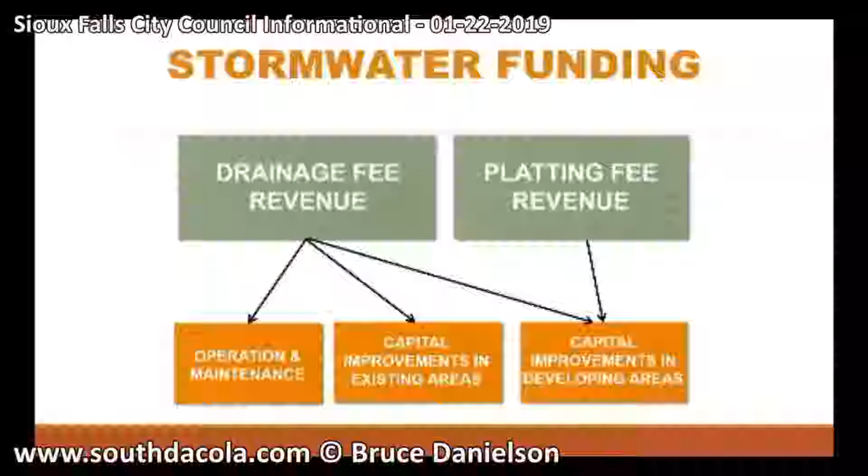Significant milestones for our program: the drainage fee was implemented in 1982. It's been around a long time, and it's a great funding source. We were very fortunate that our predecessors had the foresight to implement this fee a long time ago. There are communities trying to bring something like that forward now and facing several challenges, so it's been very beneficial. Our residents pay that fee, it helps fund our program, it's a great revenue source, and it's a separate fund from the general fund.

DENR issued us a permit in 1999, a Municipal Separate Storm Sewer Systems (MS4) permit that guides how we control water quality in town. In 2003, following that permit issuance, we developed a master plan that identified regional BMPs throughout our city to serve both the water quality and water quantity detention needs. In 2005, we implemented our sump pump collection system requirement for all new development. In 2014, our flood control levees were certified, which took over 1,200 properties out of the floodplain — a very significant change to the system.

In 2016, we introduced our construction team into our collections crew. They're able to go out and do a lot of the work we were having to contract out before. Then in 2017, private BMP ordinances were adopted that allow us to regulate private BMPs that previously were not addressed. They were required to be installed but were never really looked at afterward to ensure they were functioning properly per our permit. I'm not going to read all these, but there are some interesting stats.

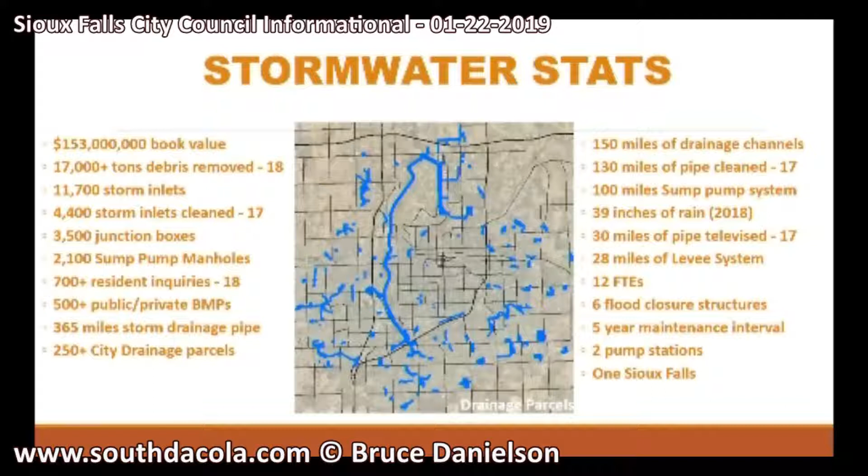I'm going to focus first on the maintenance opportunities and activities that our group does. We have a great construction crew, jetting crew, and televising crew that go around the city all year round, performing improvements and checking that our systems are functioning properly.

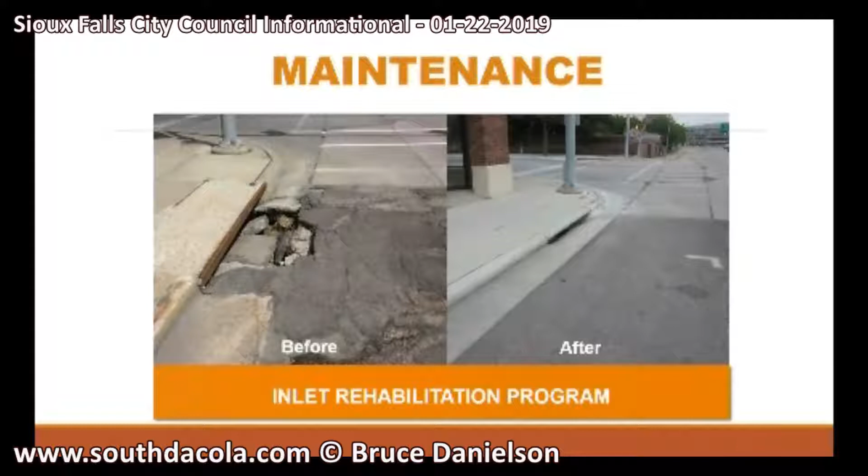Here's a great picture of our inlet rehabilitation program. Inlets not only fail with the lids getting broken, but if a seepage point or void develops between the pavement and the apron on the inlet, a sinkhole can start forming and pavement will start falling in. As you can see on the left, we go out, cut that asphalt out, cut that curb out, rebuild the inlet, and it looks really nice after our crews get done with it.

Some areas are a challenge where grades are very flat and intersections are not able to drain fast enough, so we do what we can in those intersections to try and get that water out before it gets to private property.

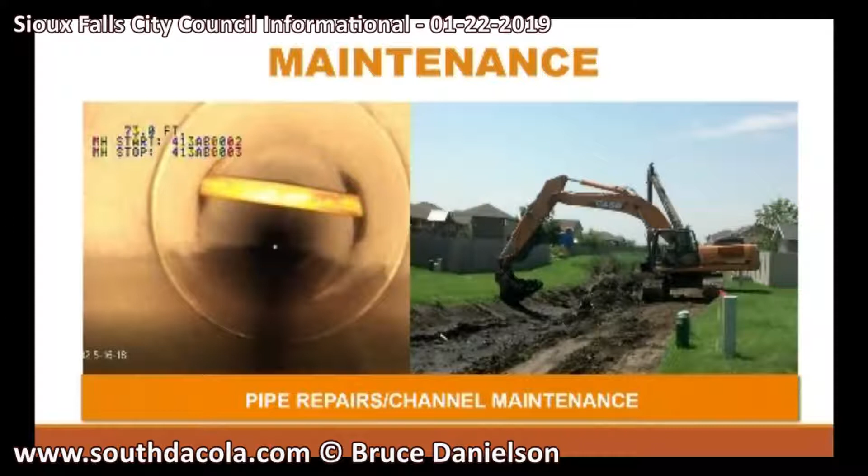Some of the constant problems we fight are utility hits, punctures to our system. It's a challenge that the private industry will tell you is very difficult at times as well. Nobody can be perfect, but that's why we televise our lines, to see if something like this has happened. We can address it with that private utility, make sure we get that out of there, get the pipe replaced or repaired so that when debris and water is flowing down that pipe, it's not getting hung up and losing capacity in that pipe system.

On the right is a drainage channel out by Grinnell Avenue and 32nd Street. A few years ago, we had to go in there. It was getting overgrown to the point where water was not able to properly flow through and drain out in a timely manner. We went in there, reestablished that channel, seeded it back and stabilized it, improving the capacity in that channel. This is a great example of a much larger scale channel rehabilitation.

Natural channels are a wonderful thing, but when a tree dies or gets eroded and tips over and lays across a channel like this, when water flows through there it finds a new pathway, and a lot of times that pathway goes up onto the private property and side slopes. Then it starts to erode, and all of a sudden you'll have a 10-foot, 15-foot tall vertical drop in somebody's backyard. So we go in, and it does a lot of times require significant tree removal. It's a challenge with homeowners on these projects because they're losing a lot of those trees in the backyard. But in order to properly get heavy equipment in there to grade out that channel, add some riprap and drop structures, a lot of times trees do need to come out of there.

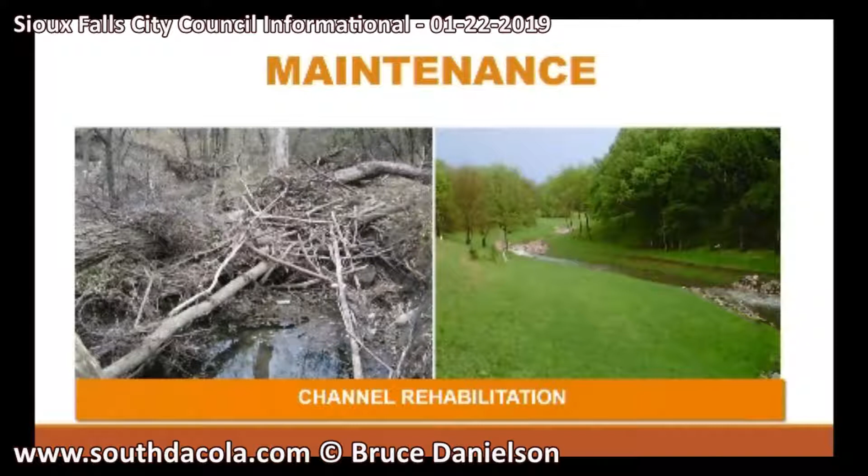A couple items that are not directly related to drainage, but we do help fund through the drainage fees, are street sweeping and mosquito control. We fund the first sweeping of the year because it has such a significant impact on water quality and our drainage system. If we can get a lot of that sand and material off the streets from winter de-icing activities before it gets washed into our systems during spring rain events, we have less sand and grit going into our channels and ponds, and potentially less salt affecting water quality. So we fund a portion of the street sweeping program.

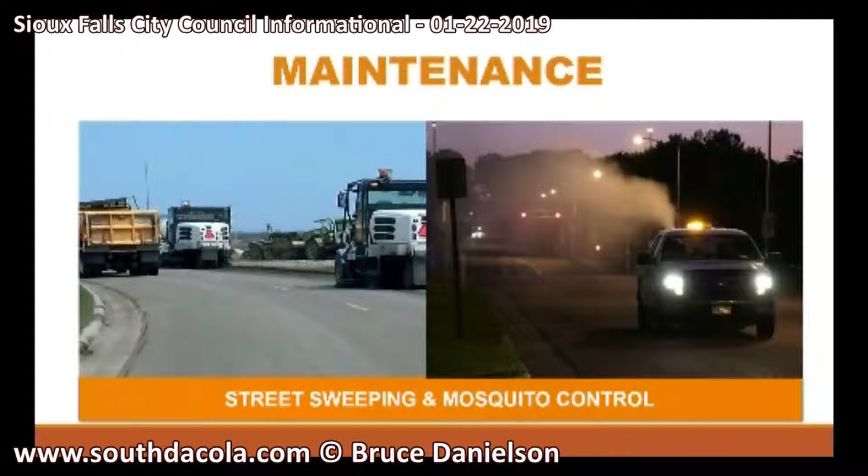Likewise with mosquito control, because you saw that map earlier with over 200 drainage properties around town which have water or saturated conditions, we contribute to the mosquito growth potential in the community, so we fund a portion of their budget as well.

Vegetation management - I know I've had discussions with some of you on this. This is very much an eye of the beholder type thing. Some folks like to look out their back windows and see a native prairie, others want to see a manicured bluegrass lawn. We, 7 or 8 years ago, implemented this program: on drainage properties, we do not mow the entire property. We mow the outside 12 feet as a buffer to adjacent properties. The remainder is left in its natural state with weed control, using an aquatic-safe chemical sprayed on the weeds to manage thistle growth and that type of thing.

We've also done this with buffers along the bike trail system throughout town. Those taller grasses, while they can collect garbage, that's the idea sometimes - they provide a filter or buffer before water can carry pollutants or debris into our waterways, into the river.

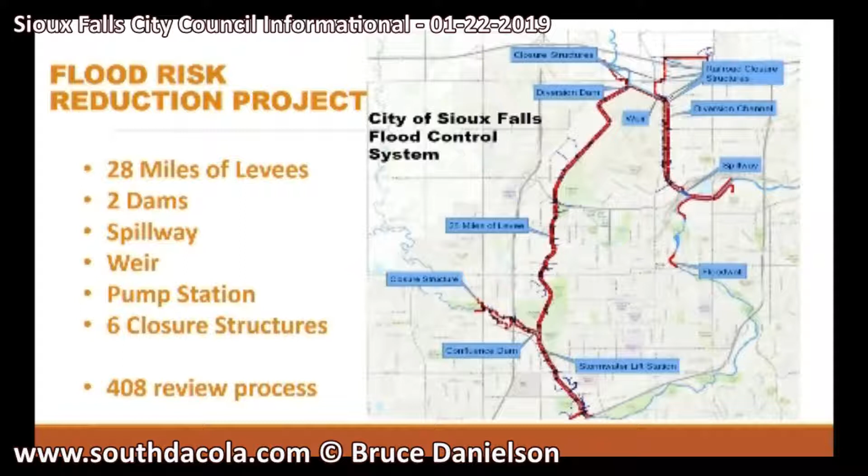One of the primary tasks I deal with regularly is the 408 review process. I don't know if you're familiar with it, but consultants in town are, because it is an extremely lengthy process. Anytime somebody is doing anything within 500 feet of our levee system, the Corps of Engineers requires that they review those plans to ensure the activities won't lead to seepage issues or increased risk to our levee system as a whole.

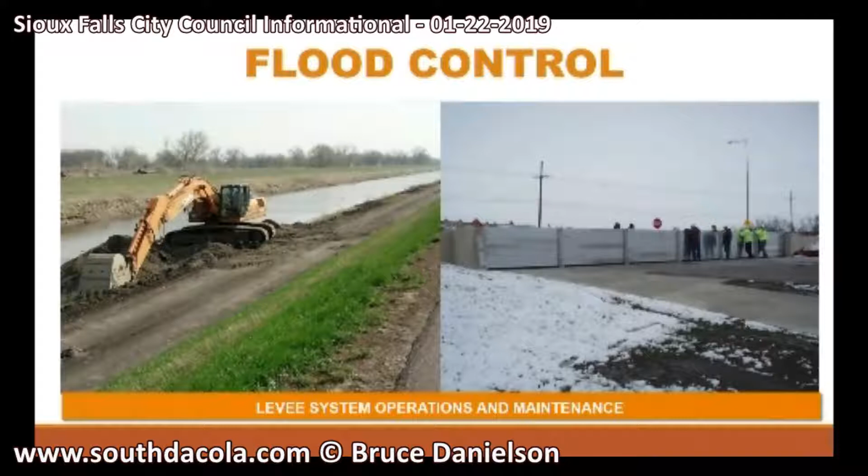I'm going to turn it over to Lance Weatherly now to talk about the neighborhood improvements and our engineering standards.

Good afternoon, Council. Lance Weatherly, Principal Drainage Engineer for the City of Sioux Falls.

I think a lot of people are aware of this project. We worked with our Parks Department to come up with a solution to address essentially a 200-acre plus watershed in the existing neighborhood. A lot of times there isn't green space or places to do a lot of improvements in a fully developed neighborhood. So working with our Parks Department, we came up with a concept to go underground.

This is the second large underground structure the city has. I believe this facility has the capacity of somewhere between 5 to 6 million gallons, almost equivalent to 3 water towers worth. And the best part is if you weren't here in 2018 or 2019, you're going to drive by and see a new park with a new walkway, and you won't be any the wiser that all this great infrastructure is under there.

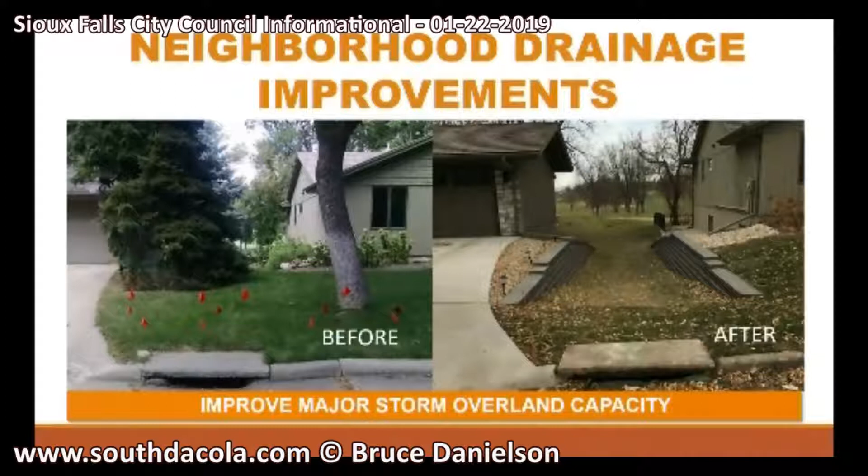Another major component our drainage team works on is the non-point source program. A non-point source is different than a point source. A point source is essentially the discharge coming out of a pipe. A non-point source is essentially scattered throughout. An example of non-point source pollution could be someone haphazardly putting fertilizer all over their sidewalk.

With the city's partnership with the Department of Environment and Natural Resources, the DENR gives the city some principal forgiveness on our low-interest SRF loans, and that is in a sense held in trust by DENR. The city is able to capitalize and work on non-point source projects throughout the Skunk Creek and Big Sioux River watershed. The bulk of those projects are upstream of Sioux Falls, essentially between Sioux Falls and Baltic.

Those programs work with agriculture producers to establish easements for exclusionary grazing, essentially keeping cattle out of the river to keep that fecal load down. Also, as you can see, the bank gets beaten down and eroded, and that promotes additional total suspended solids. Other programs work with producers to provide alternative water sources away from the river, or sometimes work with them on monoslope barns and things like that.

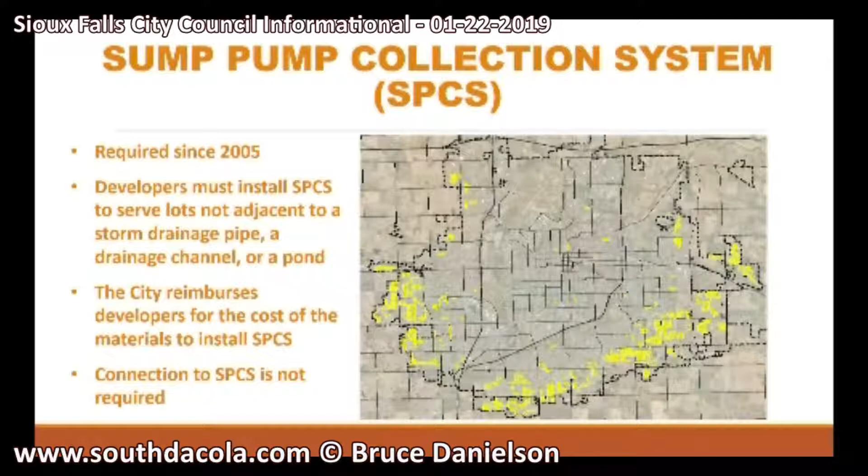Developers must install a sump pump collection system to serve development. There are a few exceptions for very large lots, or if it's a slab-on-grade home, a sump pump collection system would not be required. The city does reimburse developers for the cost of materials to install the sump pump collection system, and as of right now, connection is not mandatory to the sump pump collection system.

That previous slide essentially was focusing on sump pump collection systems and new development. We also have a program for going in and doing retrofits in existing neighborhoods.

On our website we have a petition form for existing neighborhoods constructed prior to 2005. If there's a lot of sump pump discharge creating a nuisance, we prioritize where we go with those funds. We install those in the front with a directional drill in the boulevard. If someone is pumping and creating a nuisance, we will have them connected—either underground directly, or we stub up a riser pipe they can put their black hose into from the top.

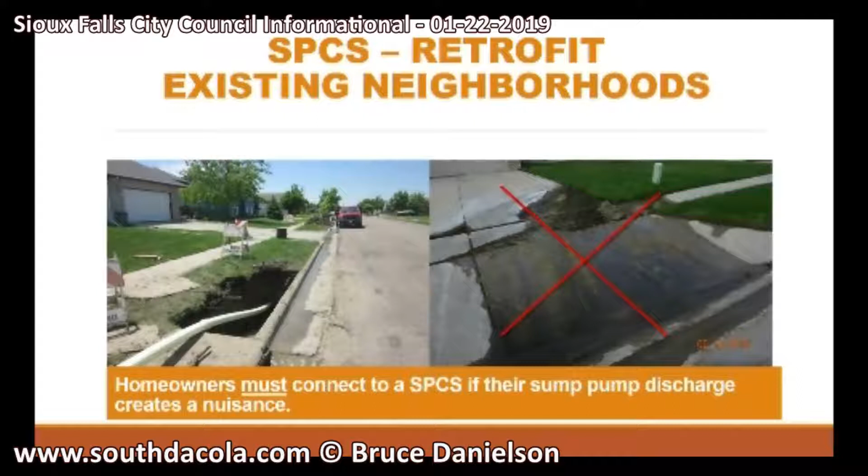The image on the right with the red X through it is actually from our sump pump collection system project from 2018. You can kind of see the algae there, but if you've ever walked on a sidewalk with algae from sump pump discharge, it's one of the slipperiest things you will encounter, and it can be very dangerous and hazardous.

As we alluded to, if a person's discharge creates a nuisance, ordinance can require us to have them connect. But it's not as simple as just saying someone needs to connect—they actually have to have something there to connect to. A lot of times there might not be an inlet right there, or there might not be a drainage way they can go to.

With sump pump connection not being mandatory, a lot of times when a person is designing or building a home, the discharge for that pipe might end up on the opposite side. So what can happen is, at the time of construction, a potential $600 fix can turn into a $3,000 to $4,000 ordeal.

We are very discretionary before we would demand that onto a resident, and we want a very high standard to make sure it qualifies to meet that, because that is a very big out-of-pocket expense to a resident.

Other common nuisances brought to our attention include a hose across the sidewalk. When that happens, we commonly contact the resident and let them know a flat hose is acceptable for discharge. We also get questions about whether it's illegal to pump in the street—it is not illegal to pump to the curb as long as they're not creating a nuisance. The street curb and gutter system does drain to our storm drainage system.

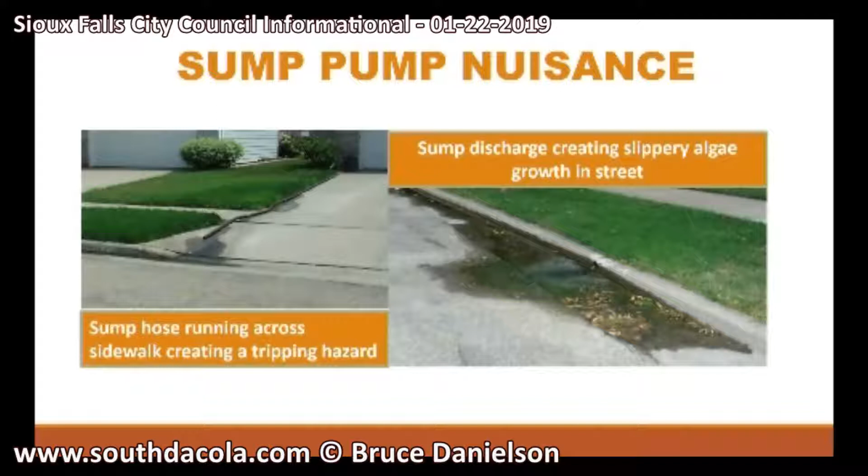A lot of these situations can be very contentious. Probably the least favorite part of my job is going to someone and telling them they need to invest funds to take their own fence down out of an easement and move it over 10 feet.

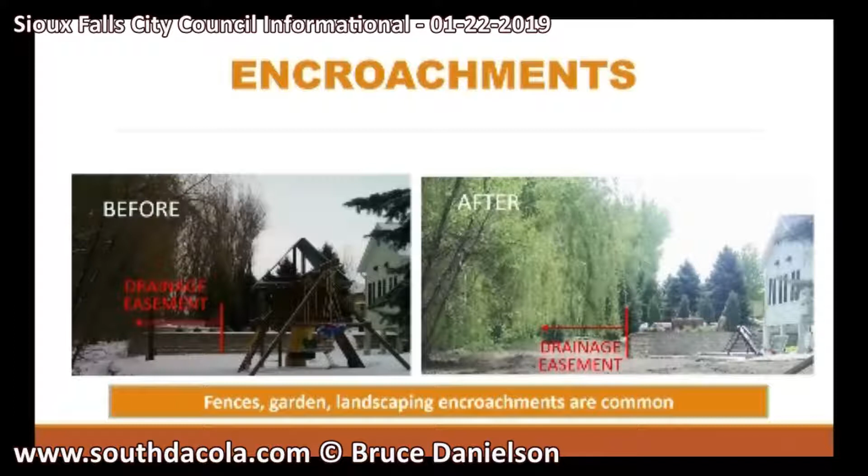Drainage concerns—as elected officials, you likely get contacted a lot about these. They essentially boil down into two big buckets on how the drainage team responds: either public drainage concerns or private drainage concerns. In 2018, I believe we had over 700 individual specific contacts with drainage concerns from our residents, and in facilitating responses with our available resources, we have to identify which ones are public and which ones warrant the city getting involved.

That might be something to either invest funds or look at programming an improvement, or if it's a private drainage concern, our response generally is to thank them for contacting us, encourage them to work with the offending party, and try to work out a solution together.

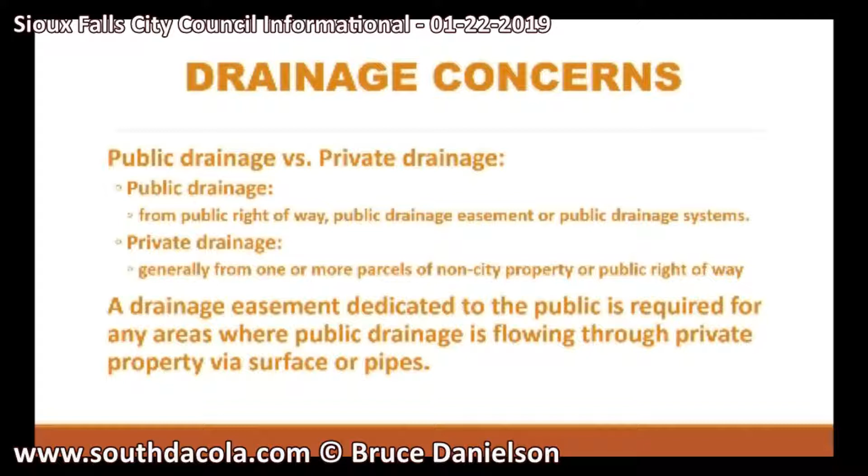Private drainage is essentially defined as drainage from a non-public source—so if it's not coming from a public street right-of-way or public easement, usually raindrops falling on someone's backyard or roof, that's considered private drainage. A drainage easement is dedicated to the public where public drainage flows or is conveyed through private property.

It doesn't necessarily mean it's your neighbor's drainage coming through your lawn—it's that we have a specific drainage easement. A lot of private drainage issues just come down to being good neighbors with each other. If someone contacts us questioning what they should do, I'll often encourage them to talk to their neighbor first, because communicating ahead of time helps a lot.

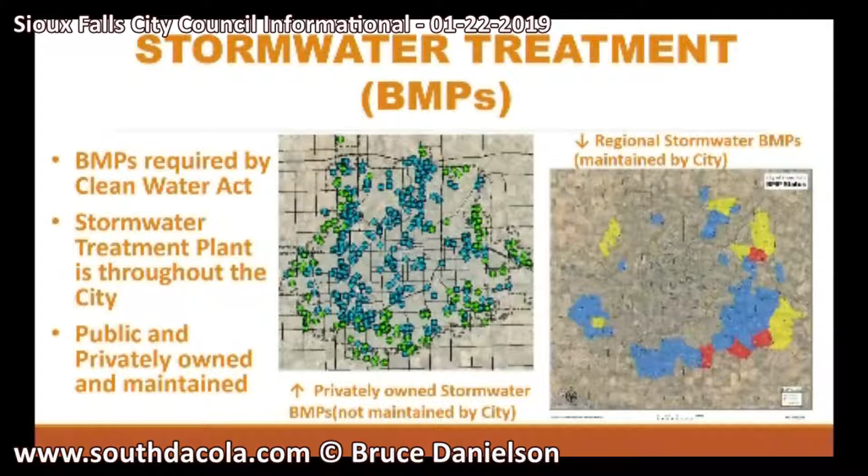So we're using that to identify, looking at coordinating our capital improvements program with major streets, things like that, and also looking at known issues is what's kind of driving us where to go. Right now we're on the precipice of putting together our plans for our 2020 to 2024 capital improvements program, and that's where we look annually at the wish list of all the projects we want to do, and start prioritizing which one we should do this year, which should follow, or are there ones we want to bump up to coordinate with another project, or others that aren't as high priority that can move back. So it's something we look at every year in conjunction with our capital improvements program.

So long-winded answer. If I could just follow up. No, that was a good answer. But in those areas of town with pre-drainage standards, is that kind of what we're talking about here? Trying to wrap your arms around those areas of town.

I think I know what slide you're going back to. So 43rd Street. Before there were drainage standards, and there's sheds and whatnot - are you going to try to take a comprehensive look from a citywide perspective, or because you kind of get stuck dealing with them piecemeal? I've been involved in two of them, and I don't envy your job when you try to do it that way. So on 43rd Street, we originally did a study, and that's what drove the project, and that's where we kind of looked at a comprehensive improvement for those 22 blocks.

We're going to get everything done while we're there. We're going to get the drainage fixed, we're going to do any spot sanitary repairs, we're going to get the streets fixed, and we're going to provide them a brand new park. So those are things we look at. But yes, those studies will essentially help us determine how to prioritize projects for the capital improvements program, and take that bigger area, that bigger picture look.

Yes. Okay, Councilor Soehl. Yes, down around the Augustana College area, there are several properties that I believe the city has bought up for storm drainage. Could you give me a little more information on how that process works and what your plans are with those vacant lots?

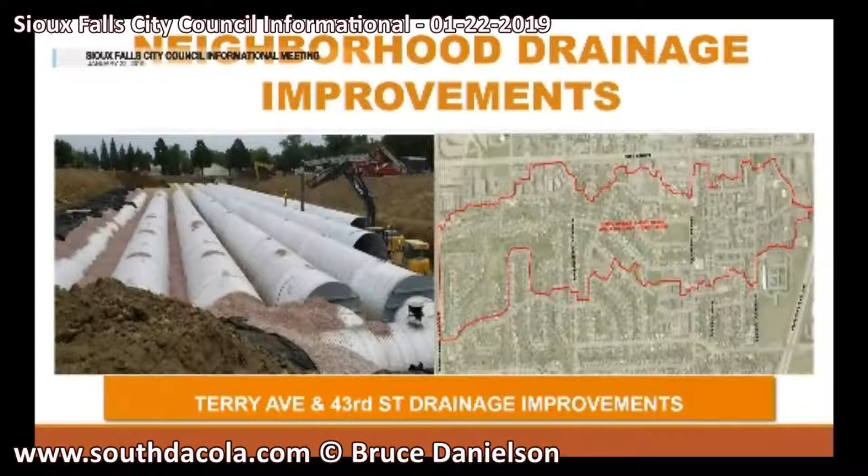Thank you. Councilor Neitzert: Thank you. I do have a handful of things, so I'll ask the standard three and then defer. I will say I was inside one of those pipes when it was still under construction. It was pretty cool, and I do appreciate what you do, because this is one of the toughest things we deal with as a council.

My first thing is positive drainage away from a home. I think that might be in the building code. Does anybody inspect that with any part of the building permitting to make sure the International Building Code requirements are met? It states there should be 6 inches of fall within the first 10 feet of the building. That is upon our building inspectors when they're doing their inspection to essentially walk around and take a look and make sure that is happening.

Now, 6 inches of fall 10 feet away from a building might help you a little bit, but in a major storm there's a lot of other things going on. If the building is constructed 2 feet low, or someone snuck a walkout into a lot that shouldn't have been a walkout, that's not going to help you. But it certainly will benefit with positive drainage away. Yes, that's a component of the International Building Code.

Okay, we talk a lot about how this property wasn't developed before there were drainage standards, and so sometimes a home is below the curb, things like that. Is there a date where you can say as of this date the city adopted a drainage standard? Is there a magic point where prior to a certain year there was none and after there was, or is it not quite that clean?

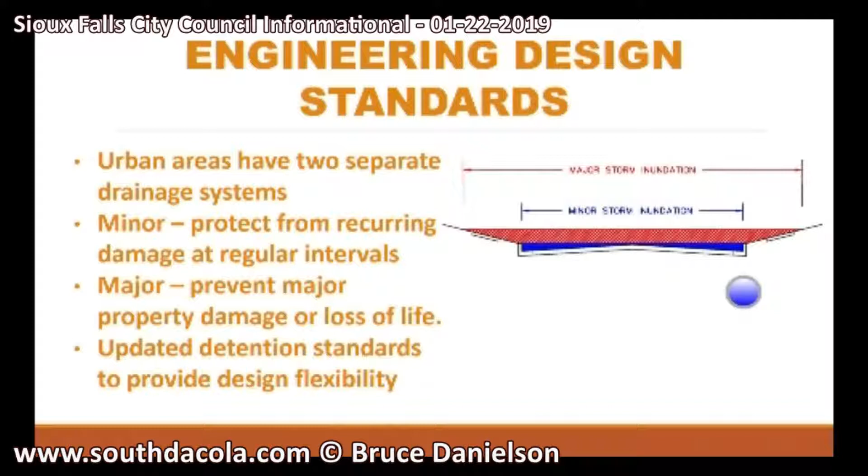So the question I was going to ask, going to the major storm, the 1%, if we have something that's a 1% or greater storm, it's going to overtop the curb, now it's getting into yards.

If our yards are flooded, but it hasn't actually reached our homes, did the system work as designed? Is that a success? In new developments, we would want to contain the 100-year storm within the right-of-way, generally right behind the sidewalk. So we'd look at both the depth and containment, but generally we want to contain that major storm within the right-of-way.

Okay, thanks. Councilor Selberg: Thank you, Madam Chair. Thanks, Lance. Question on the slide that says maintenance, pipe repairs, channel maintenance. I think you talked about that's out at Grinnell.

That's similar to what's been done out in my neighborhood. I kind of watched that whole process, it was fascinating. How often are there a lot of areas like that? It was interesting because there was kind of a wildlife refuge area behind it with weeds, and it was kind of nice, but now it's just cleared out and seeded. Was that done because we've had drainage issues out in that area, or did it tie in also with the 85th project, so it served two purposes?

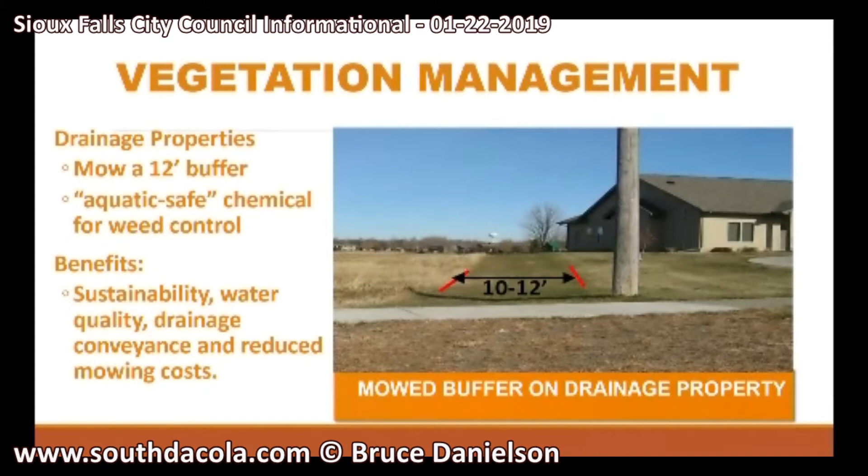That makes sense, I was just curious because some people enjoy mowing since they're already out there with two swipes of their own mower. When I started, there was a gentleman who'd mowed for us 20 years, raising his deck at one house and lowering it at the next. We decided that was ridiculous since it's city property, so we just mow all the way through. If folks want to do additional mowing on top of that, that's up to them, but we don't grant permission for it.

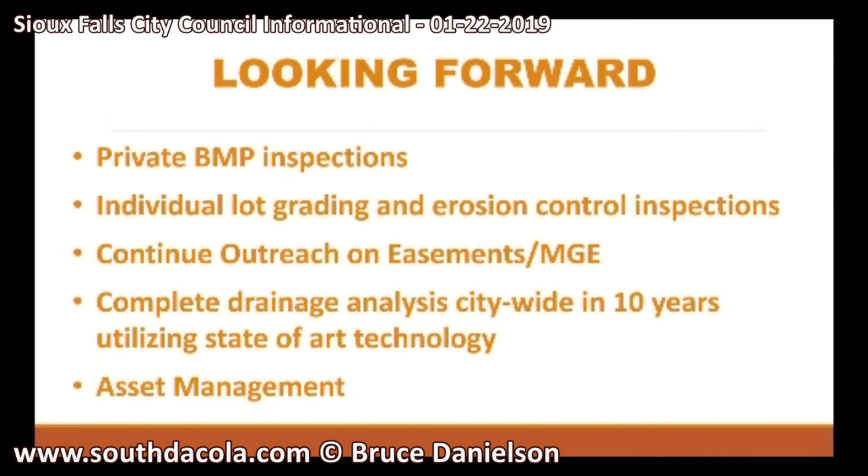Thank you. My last question is about looking forward. You had five bullets talking about a complete drainage analysis citywide in 10 years utilizing state-of-the-art technology. I'm curious what kind of technologies you're referring to, and what new ideas could make your jobs easier to assess the drainage area—maybe drones or something along those lines?

The technology we're referring to is LiDAR data. About every 2 to 3 years the city gets reflown. In 2012 we had LiDAR data at 2-foot contour intervals, and in 2017 it was reflown at 1-foot contour intervals. On a really flat street, with only 2 feet between points it can be hard to figure out what's going on, so the 1-foot contour interval data is much better.

We'll probably be working with GIS to bring back a request for a LiDAR update in the next year or two, so we'll look for your support on that, especially as fast as Sioux Falls is growing. It's good to have updated aerial photography so when a resident calls about a newer subdivision, you can actually see there's a street and house there instead of just a cornfield.

We have new software that analyzes things two-dimensionally, which helps us ascertain better inundation information about what's going on. Our bread and butter will be CIP number 11087, our regional drainage improvements and analysis. We'll bring that forward in our next CIP, funding our studies and improvements, and that's essentially what I'd ask the council to support.